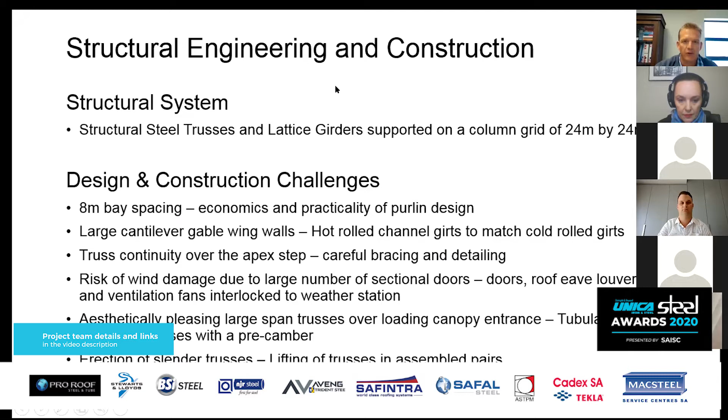However, what is unique to this particular warehouse is that in order to work well with the tilt-up panels and with the floor slabs, we went for an 8-meter bay spacing.

Now, obviously, when you're doing your purlins, you want to try and make them continuous over at least 2 spans to help manage the deflections. So that was an interesting challenge, because the transportation of 16-meter long purlins can be an issue.

But we put that in our tender data that we wanted 16-meter long purlins, and the contractor Paragon was able to get them fabricated to that length and able to deliver them to site and erect them. So in the end, we ended up with an efficient solution there, which was good.

Another interesting aspect on the warehouse is we've got these large cantilever gable wing walls, which you'll see shortly. We also had an interesting apex, a sort of angled step on the apex that needed some careful consideration.

And then on the predominant wind-facing side, we also got a number of doors, large sectional doors. So we just needed to manage wind risk carefully.

We also, over the loading docks, had some very large spans that we needed to manage in an aesthetically pleasing way. And then finally, there were some construction challenges, which I'll get to, and I'll address each of those points using slides, just to help provide visual aid and information, because it makes it a little bit more interesting.

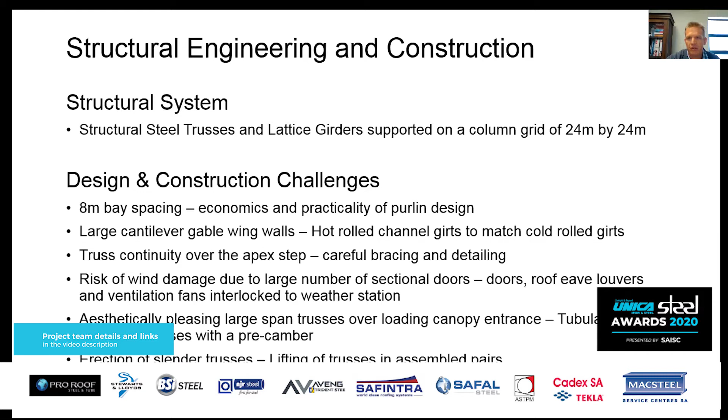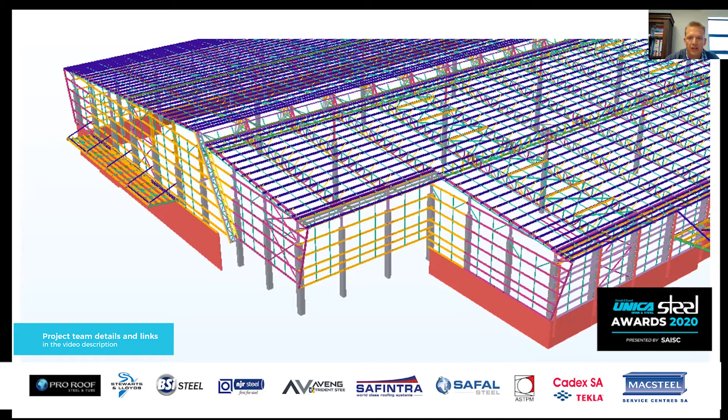So this is the particular model of the building. With regards to the wing walls, what we did was we made use of hot rolled steel on the girts that extended into those wings, so that we could get the strength that we needed, so that those cantilevers could work, because they're obviously highly exposed, and we needed to manage that very carefully.

And what we did was we were able to use hot rolled sections that were very similar in size to the cold rolled sections, and internally we painted them silver, so you almost couldn't distinguish between the two.

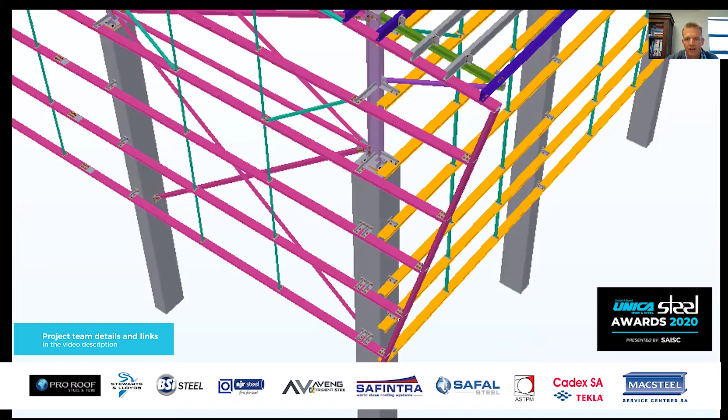And obviously they worked well and gave us the strength that we needed to cantilever out on those wings. We also had to be careful with those connections back to the columns, just to make sure. You can see the connections to the concrete columns there. We ended up adopting double cleats with additional anchors.

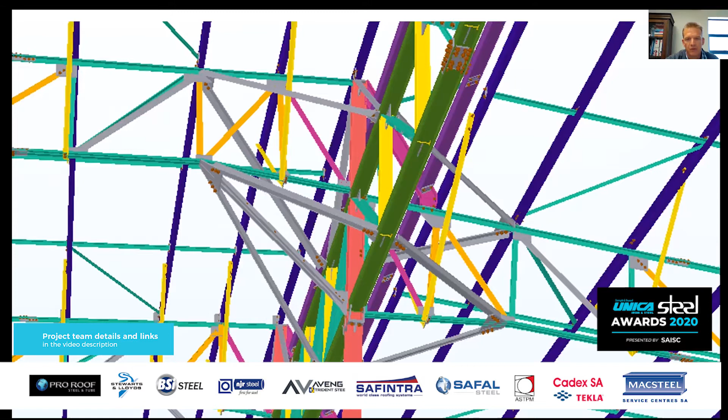This is the shop detailing of the 45-degree apex step, and as you can see, there's a lot of careful consideration that we had to make there to get the benefit of the structural continuity, but also to manage bracing without ending up with clashes all over the place. So that was quite interesting, but we managed to resolve that, and we ended up with an efficient design there.

And then another thing which is possibly unique, I don't know if you guys have come across this before, but what we were able to do is work with the mechanical engineers to integrate the mechanical ventilation system into a wind risk management process, where we interlocked the weather station into the louvers and the fans, the ventilation fans in the building, as well as the sectional doors.

That weather station measures wind speed, but it also determines the wind direction. And obviously with such a large loading canopy, there's going to be some confinement of wind under that canopy. What we were really after was to try and manage the development of high internal wind pressures within the building. So that weather station is interlocked with the sectional doors, which are motorized, as well as the ventilation fans. So when you have a high wind, for example, from the loading canopy side, the sectional doors are closed and they cannot be opened.

The fans and the louvers on the wind-facing side are closed and turned off, and then the fans and the louvers on the leeward side are turned on, and that just helps to eliminate any pressures that develop from around the perimeter of the building.

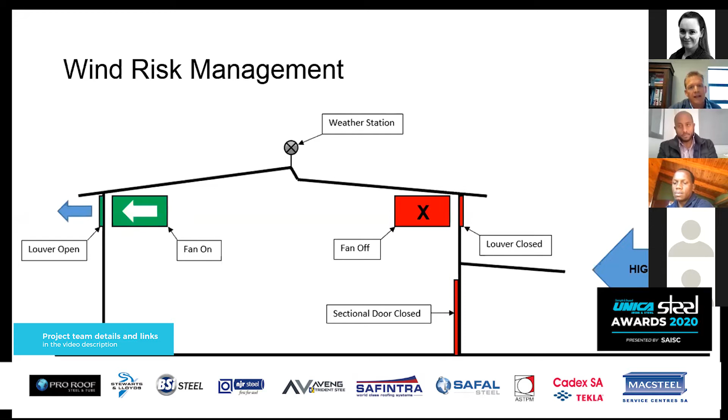And then on the loading canopies, we had large spans to manage, and we needed to make it architecturally pleasing and tied in with the rest of the structure. There we were able to get a triangular tubular truss to work, and those trusses are spanning 32 meters.

We integrated the foundation into the loading dock, so we didn't need separate foundations for those. We were also able to conceal the downpipe from the box gutter within the columns, giving a very neat solution, and those columns are galvanized. So just in case there is any leakage at some point in the future, at least they won't be compromised from a structural perspective. These are just some different perspectives of that.

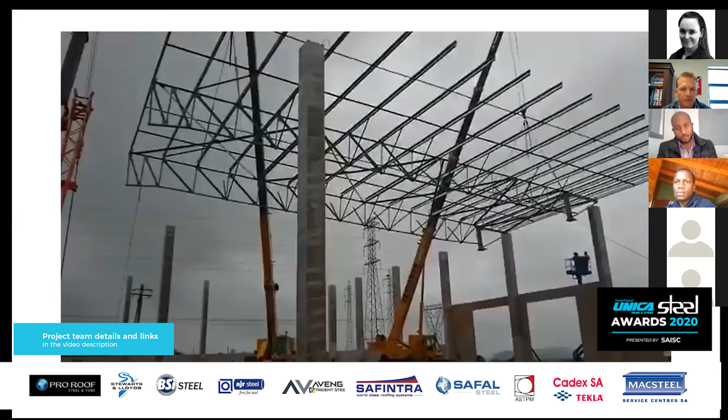And then the final challenging aspect, which I think arises quite often with assembling or erecting these large slender trusses, is just to erect them safely without them buckling. What we did in this project is assemble the trusses as pairs on the ground, and then did tandem lifts to lift them up.

The benefit of that obviously is that the large majority of the work is done on the ground, which is a lot safer. And then obviously the structural integrity of the trusses is maintained, and you don't run the risk of damaging them during the erection process. It also speeds up the process significantly, because work in the air is slower, whereas work on the ground is faster. And this way, teams on the ground could progress ahead of the teams that were actually rigging the trusses into place. So yeah, it worked extremely well in the end.

In terms of why steel, for a large warehouse it's an obvious choice. There are significant benefits in terms of time, because a large portion of the structure is fabricated off-site, which means on-site installation is a lot quicker. With structural steel, particularly the trusses, you're able to end up with a very efficient, lightweight construction. The most impressive achievement from a structural point of view is that this building has such pleasing and interesting aesthetics, with striking angular features, yet we were able to design it structurally in a very efficient way.

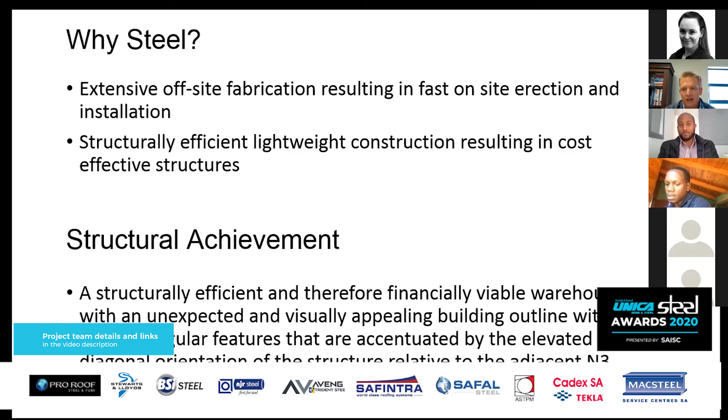Especially considering its proximity to the main N3 between Durban and Pietermaritzburg - you can see just how close the N3 is. Because this building is up on a platform, it really has prominence when you drive past, and the client really benefits from that. That's basically what that elevation looks like, and it really, really looks good.

Next we're moving on to the architectural aspects, and I'm going to hand over to Mark for that side of it. I was just about to suggest that. You beat me to it.

Sorry, let me just, one second, Mark. Sorry, there. That's perfect, thanks.

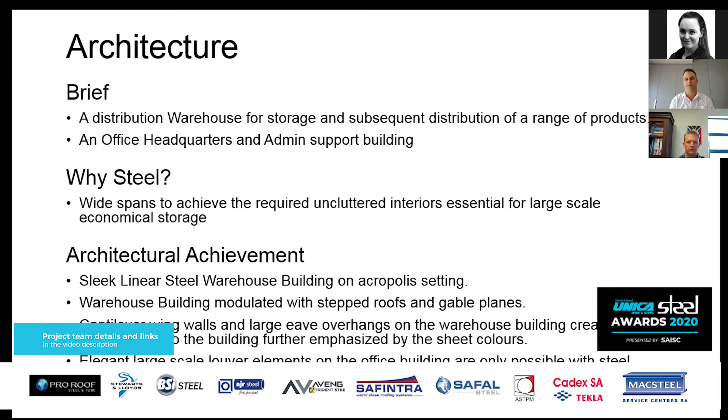We've got these large wing walls and overhangs along our eaves, which not only create a very lightweight frame elevation to the building, which we further emphasized with the sheeting color. It also created shading elements for our translucent sheeting, so we're getting the benefit of the light but not direct light, so that the product inside doesn't get damaged. This is an important aspect we had to consider.

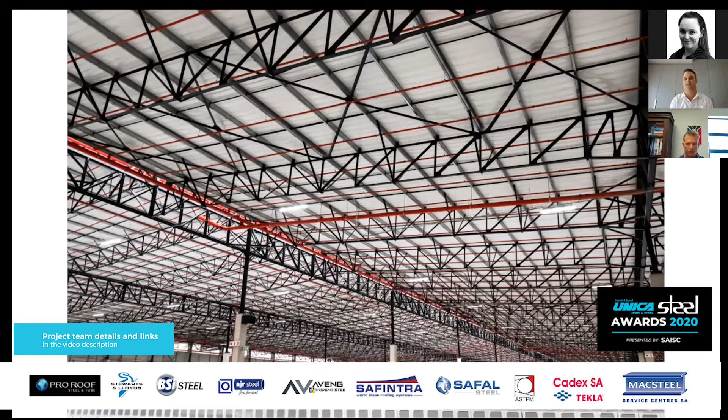The stepping gable facades of the warehouse are interrupted by the office elements that work hand in hand with the warehouse. The way we've tried to handle that is by slicing pieces of the lower warehouse out and inserting these offices with a white frame, which contrasts very well between the office space and the warehouse space, and aesthetically allows us to achieve the outcome we were looking for.

The office block itself is comprised of various departments, being its head office. With the freeway architecture aspect, what we've tried to do is keep a very simple linear form that engages with the road, interrupted by these overscaled louver elements in the vertical plane. For us as architects, it's vitally important that those things read as a more elegant element as opposed to some big chunky thing.

The only opportunity we have to achieve that is by using the framework for those louvers, otherwise it wouldn't be possible. So the steel aspects that we carried through from the warehouse space into the office design, to allow certain aesthetic images to work, is vital to this design. Otherwise it wouldn't be possible.

Essentially, we're happy with the outcome. We believe it's working very well, as it's been operational now for a couple of months, and it certainly stands out in the very remote position that it's positioned.

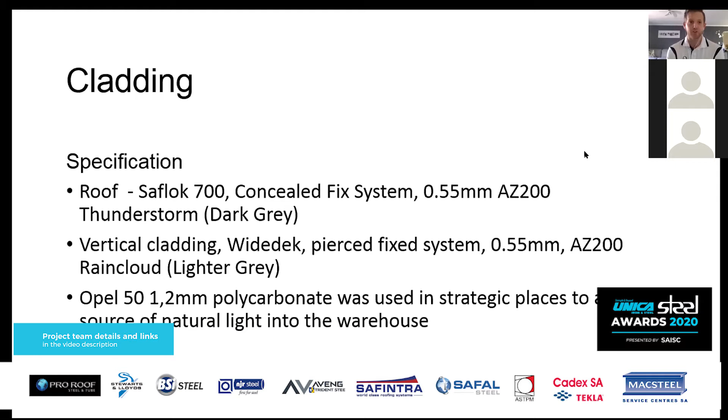We had a few challenges from our side at Safintra because, as you can see in the picture, there's very minimal space for on-site rolling, which we had to do. So we had to coordinate with the team to find the best position for the mill. With sheets being over 50 meters long, we needed to know where to position the mill to minimize movement of sheets once rolled. If I'm not mistaken, we rolled everything on the far right-hand side where the building is. The cladding team, MJC and Sheldon, then hoisted and lifted the sheets up from the side and onto the roof.

With such minimal spacing, it's not the easiest to get access anywhere to get these sheets on, but specification-wise it actually turned out very well. We're very impressed and very happy with the outcome. I was just saying to the team this morning that our business head, Justin Jackson, was driving down the other day and commented on the building going past, saying it's turned out so beautiful and stunning. We're actually very happy with it as Safintra as a whole.

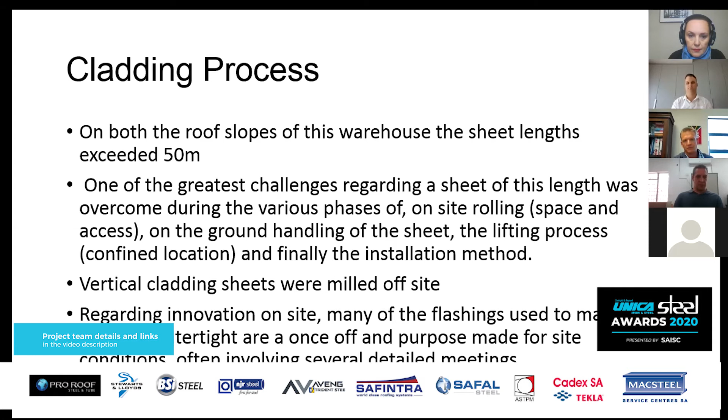Moving to the next slide, that's pretty much it for the cladding process. In terms of steel, everyone knows and uses it for its natural characteristics—its strength, its rigidity—and the way the cladding was installed, it's good to see how a product with such characteristics can be manipulated into such an appealing format and used to really accentuate the building's architectural standpoint. The way the sheets are rolled on site and used to clad the building really is a testament to the architectural standpoint of that building.

I often say when we're doing sheeting, it's pretty much a skirt—it's like putting a skirt on the building, and we basically just make it look pretty on that side of things.

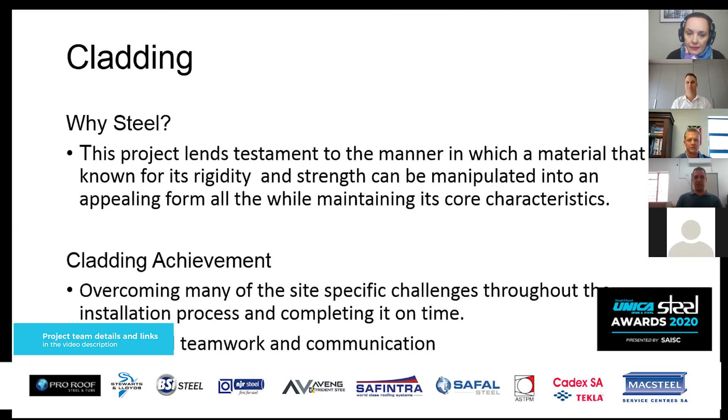Some of the achievements I'm really proud of in terms of the project itself is actually completing the installation process. A lot of the sheeting had to happen prior to any layer works or other internal works, like pouring of the concrete slabs and everything like that. So all the sheeting had to be done ahead of that.

We established sites when it was very raw, with many excavations, piles of sand and rock around, and we had to negotiate logistically around that, as Sean said, to mill a 50-meter sheet off the back of a 22-meter long truck. You're looking at over 75 meters of straight running space needed to mill the sheet out and then move it into position to lift onto the roof. That was a bit of a challenge, and overcoming it in terms of logistics on site was quite good—I'm proud of that as well.

In terms of teamwork, I think this project was one of the smoothest I've worked on, if not the smoothest. I think that's a testament to everybody's cooperation, flow of information, and having a similar goal of getting the building sheeted and looking the best possible for the client. That's definitely a commendation to the team involved. So hats off to the team, and thank you for working with us on such a project—something to be very proud of.